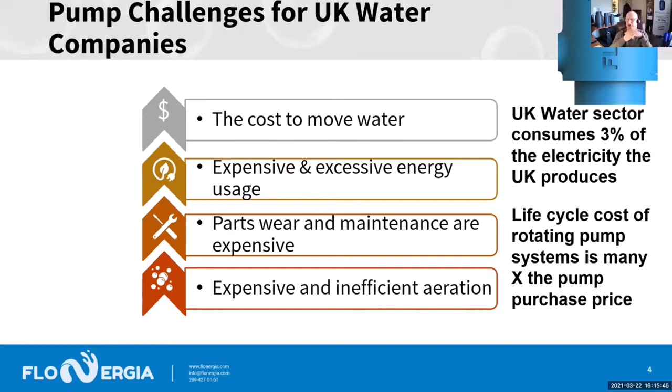The other problems are that pumps are expensive. They wear out. It's difficult to maintain them. And as we know, the life cycle cost of rotating pump systems is many times the purchase price of those pumps. So they're very expensive. The other issue is aeration generally is inefficient and expensive. It costs money, it costs energy to operate.

So how do we solve those problems with our technology? It's quite simple. Our technology uses only the air required for aeration alone to both pump and aerate water. We don't need to do both. This reduced energy profile results in savings of 50 to 70% versus conventional aeration and centrifugal pumping systems combined.

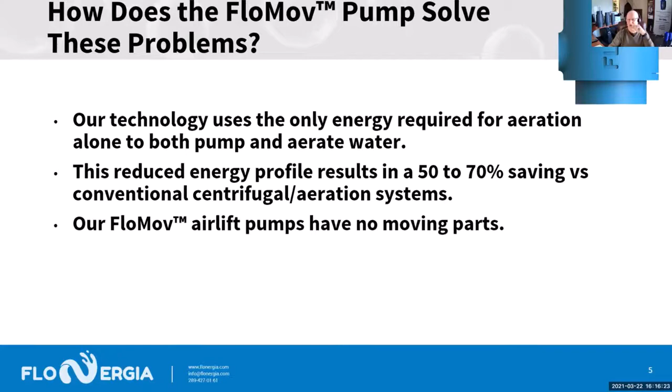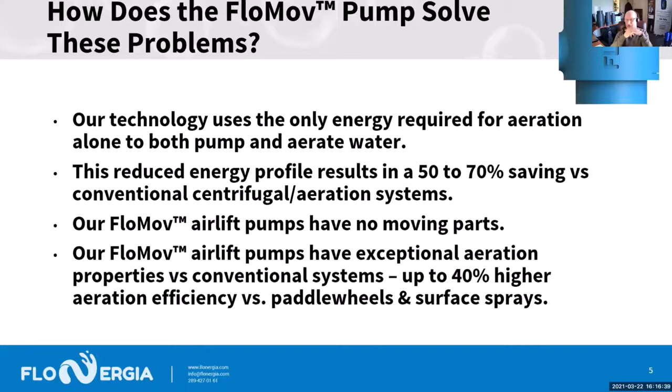Our FloMov pumps have no moving parts. There's nothing inside them. We just use air and the design of the pump itself to move water. Our airlift pump technology has exceptional aeration properties, up to 40% improved aeration efficiency versus paddle wheels and surface sprays. So you're probably wondering, how does our pump work? How does this 100-year-old technology actually function?

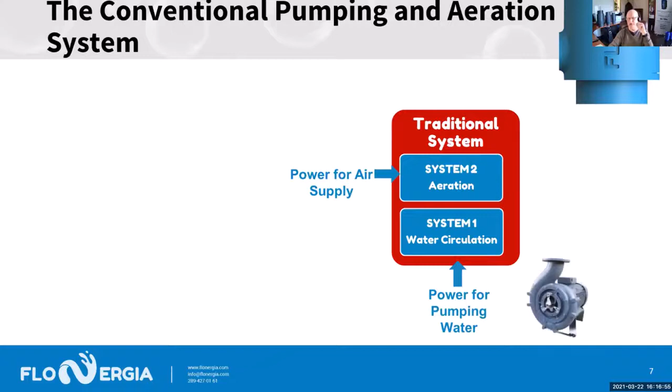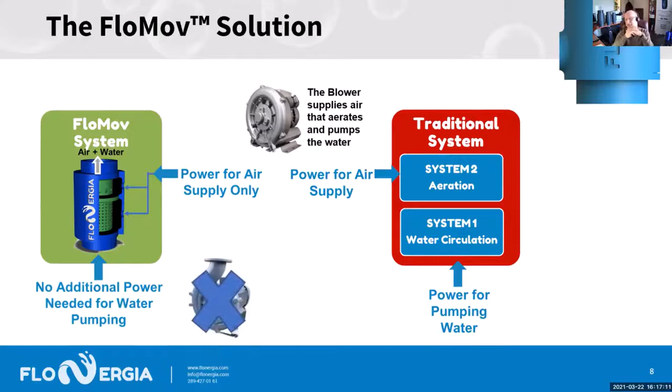Let's talk about a conventional traditional system. In a traditional system, you need power for pumping water, and you need power for aeration. For FloNergia, we get all of the power to move and aerate the water from that single blower. We don't need additional pumping. We can move water and aerate it at the same time. That results in 50 to 70% energy savings and substantially higher aeration efficiency versus conventional methods.

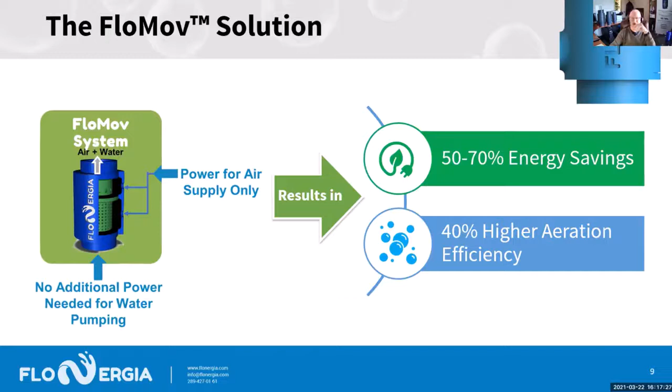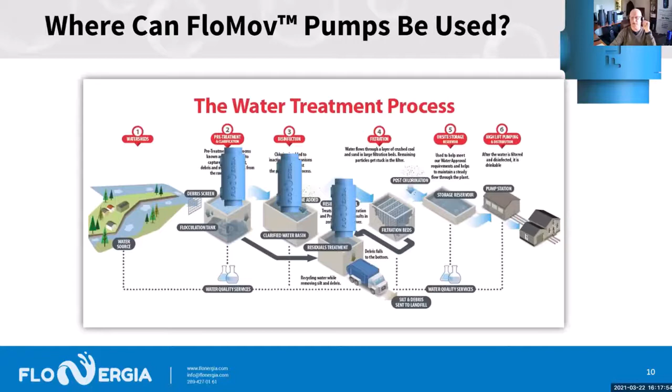So where do we go in a water treatment process? This is a standard graphic I use of the Canadian water treatment process of a typical water plant. FloNergia can be used in the pre-treatment and clarification system. We can be used in disinfection. We can be used in transfer of materials from one location to another. So let's talk about that in greater detail.

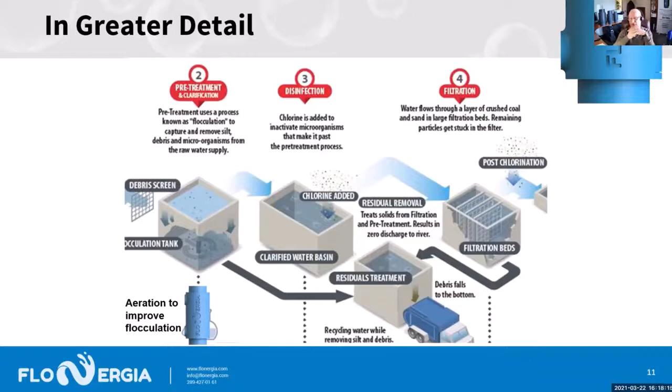Where would you use our pump in a pre-treatment section? We can improve flocculation by aiding aeration. Our aeration costs are substantially better than conventional systems, and we get pumping at the same time. We can help with chlorine or whatever your disinfectant injection is, because our technology can use intermittent injection as part of the airstream that drives the pump.

Additionally, we can be used in transfer pumping applications, moving water from one location to another. The other unique part of our technology is that we can use it to pump and transfer sludge from one location to another.

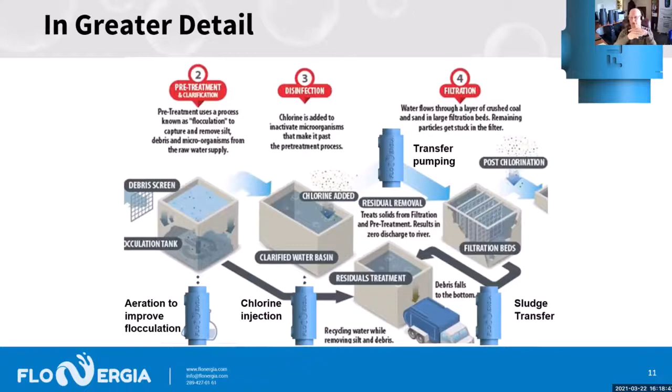A couple more benefits I wanted to spend a bit of time on. We can easily move heavy fluids and solid waste, and we've done that in various wastewater applications around the world. We have no moving parts. It can't be clogged. Our pumps are fabricated from food-grade plastic. There's nothing to corrode. There are no metal materials inside the pumps.

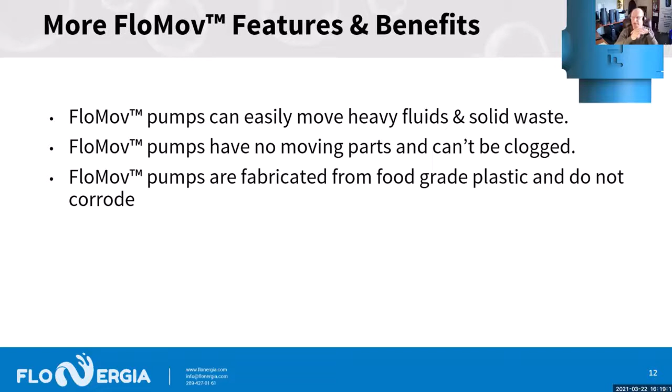Our pumps also facilitate carbon dioxide removal, which is a great feature for what we do in the aquaculture and agriculture marketplace, but it's also an interesting feature in other applications. Our pumps also disrupt thermal stratification, which in some applications is important, in other applications is less important. It depends on settling and temperature variations from surface to the bottom of a tank. We also improve DO substantially, and I have terrific numbers around that.

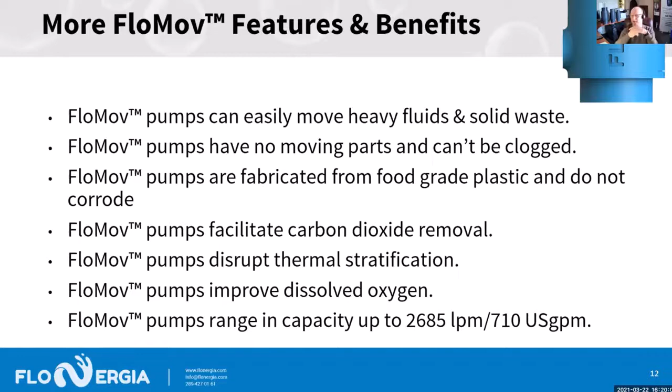Our maximum size in terms of pumping is 710 US gallons per minute. Now you may say, oh, I have a requirement where I need thousands of gallons per minute. Well, we just group our pumps together to get the same volume output.

1 minute to Paul. Thank you very much.

So where are we around the world? Selected applications: we have a 40,000 gallon tank with 3,600 gallons per minute in Canada. In Chile, we have an 80,000 gallon tank, 9,600 gallons per minute. In India, we have a transfer of a heavy sludge, 10,000 gallons, 120 gallons per minute.

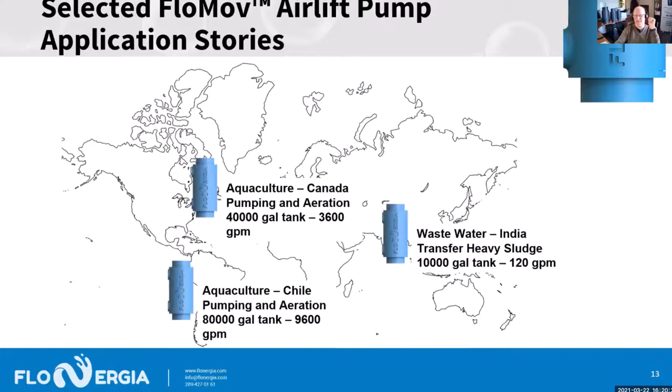How do we plan to then enter the market? Through product trials and direct sales with key water companies, through technology licensing, but primarily through partnerships with engineers, consultants, and distributors. We would like to partner with appropriate companies to find water company sites for initial product demonstrations, work with engineers and consultants for easy integration into existing infrastructure, and develop our water industry distribution matrix in the UK market.

Thank you for your time and attention. I'd love to answer any questions you have at this time.

Thank you, Paul. Again, another one brought in perfectly on time. So well done. Fantastic. Could you just pop your slides down so I can see the judges? There we go. Great. Before I can see them, I'm just going to ask John, possibly, whether he might like to start off. Yeah, sure. My head's just spinning a little bit, if I'm honest, like a pump almost.

So I'm just trying to mark in my mind that we use, as well as centrifugal pumps, progressive cavity pumps, ram pumps, and the interchangeability of those with an airlift pump, which I've not come across before. I'm not from an engineering background, so I think ultimately this is going to be the business case. So it's the cost of capex, the Totex model, which is built up of capex and then cost to operate. You mentioned there the cost savings in operation. What's the difference in capex between an airlift pump and a standard model progressive cavity pump?